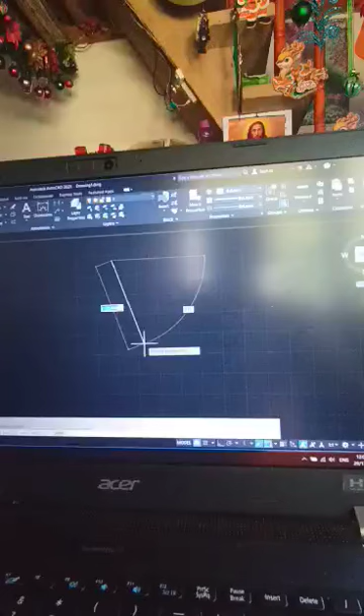Ang gagawin ko ito is, ang lot area is 100 square meter. Since nakakommand na tayo ng line, gawa na tayo ng line guys. Para hindi kayo mahirapan, para hindi na kayo ma-confuse kung straight ba yun hindi, just press F8 for to on the ortho.

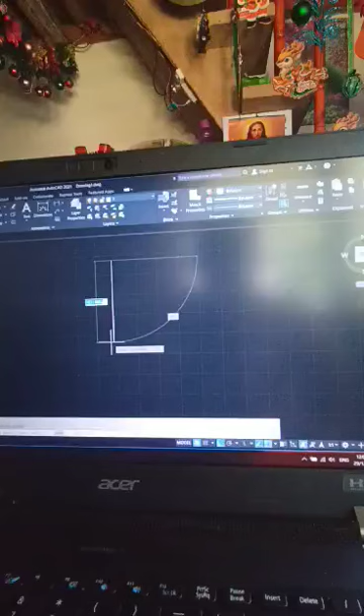Lagay nyo lang, since mm yung sa akin, type nyo lang is since 100 square meter, gamitin 10 by 10. So in mm, we have 10,000. Just type 10,000, 10. And sa kabila rin guys, 10.

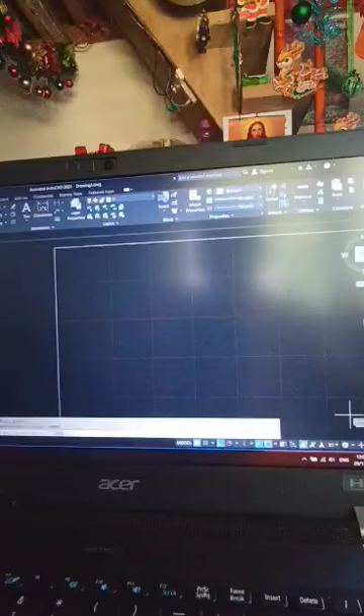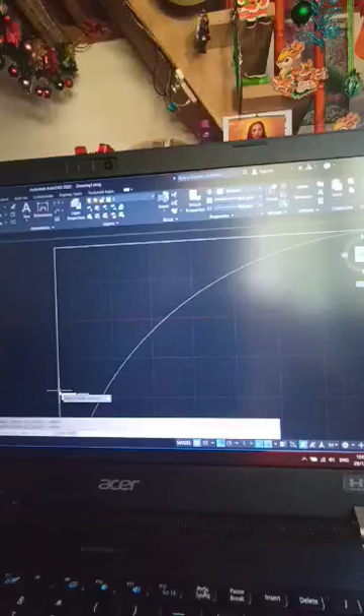So guys, ito na po yung lot area natin, no? Assuming ito po yung lot area natin. Ngayon, kailangan po natin mag-setback. Mag-setback po tayo na at least 2 meters from the rear side and left and right.

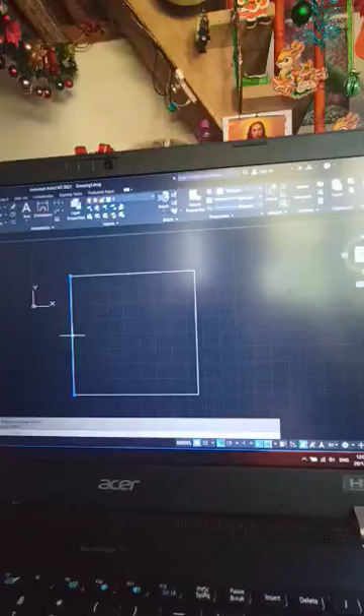Okay, so just click here. Just click the line. So as you can see, nag-highlight po yan. So just command offset. Type nyo lang po off. At may lalabas po yan, offset. Ito nyo lang, kaya, ulitin ko since mm yung sa akin.

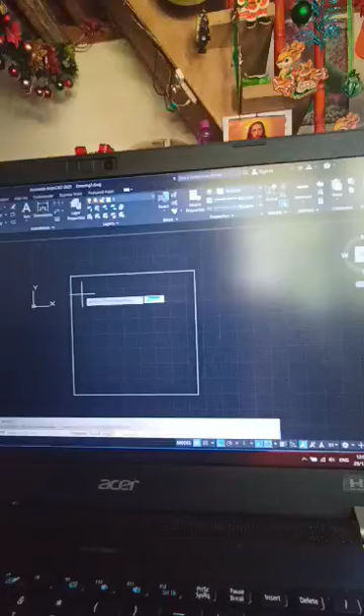May setback tayo ng 2 meters. So in mm, we have 2,000. Ayan guys, so as you can see, meron na po another line. And dito rin po sa kabila, lagyan rin po. And ayan.

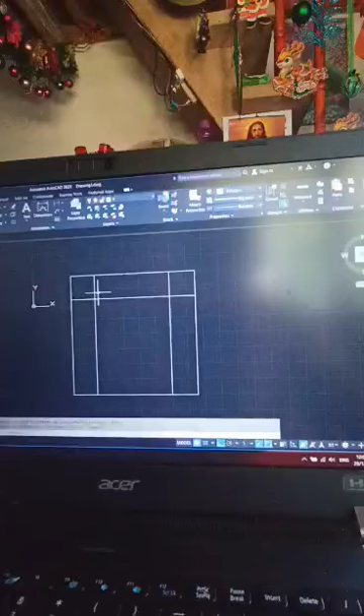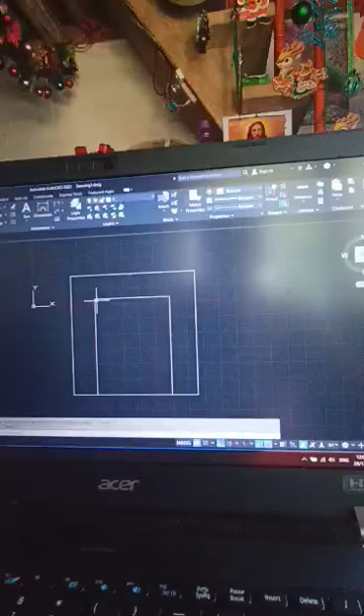So the rest, para erase po itong mga unnecessary lines na hindi nakasali, just command trim, TR lang po yun. Okay, so as you can see, ito po yung magiging setback natin. Dito, dito, dito. So may 2 meters setback na po tayo, no? So ito po natitirang line. Dito po tayo magsisimula gumawa ng floor plan.